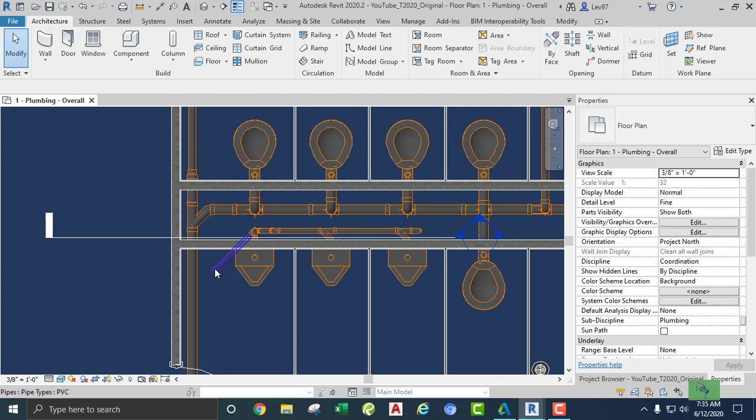Okay, so where did I leave off? Let me go back over here and just check and make sure. Okay, so I think that what I need to do is fit my 2-inch into my 4-inch.

So I'm gonna need a fitting in here, huh? So I think the first thing I need to do is find out what the elevation is. How's that? Why don't we do that first?

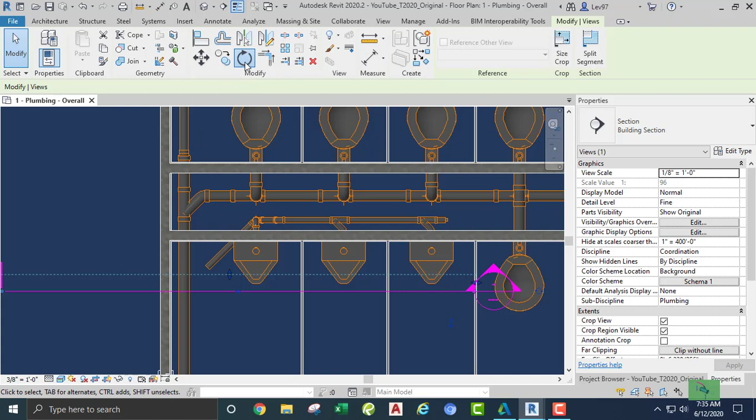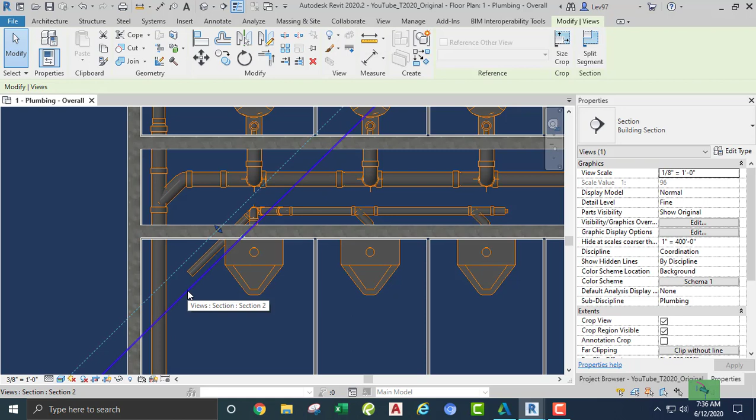Okay, let's rotate this guy. I think I'm gonna rotate this a -45, or counterclockwise 45. Okay, just to look at this, because I know that that is at a 45-degree angle, so let's look at the section and see how relevant it is.

Okay, I think I'm gonna go here, right? So if we look at the two views, let's just look at these two guys. Okay, so this guy is this guy, yeah, that one is that one, and okay, so what is that pipe? Oh, okay.

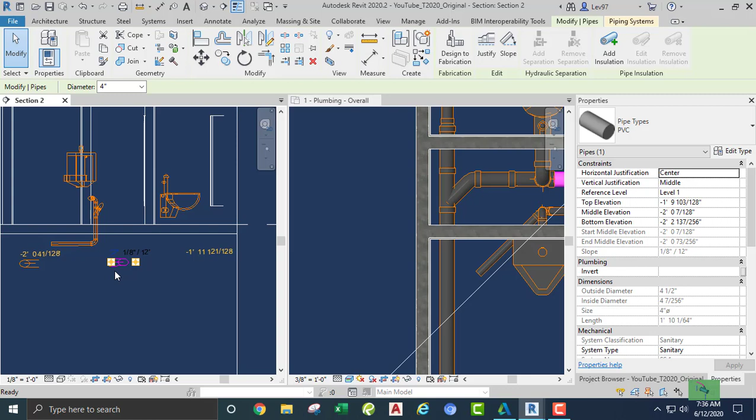So what I'm gonna do is I need to line up one pipe to the other pipe, right? I don't know if Revit is gonna break, but let's try this. Let's try to align, right? One pipe with the other. Rock. Nice, I like that.

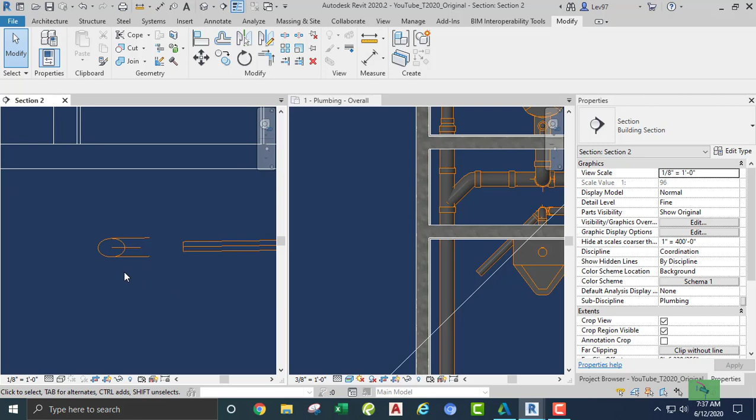Okay, so what I'm gonna do is let's go here. Let's check and make sure. Let's see what kind of fittings we have by default first.

Okay, I think that that's gonna be okay, because if I use a combination, this might be too much. So let me get a little closer and see what happens. Okay, just a little bit closer.

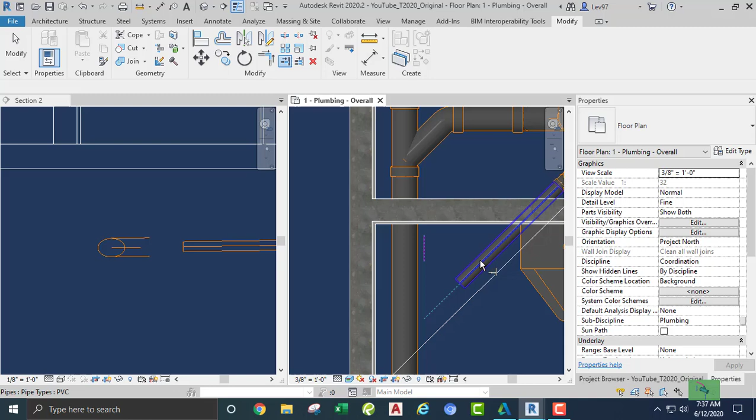So I'm gonna extend. Okay, and just go just a little bit closer. I just want to see how much alignment I'm getting with this center line. That looks good though, you know. I mean, it's not bad.

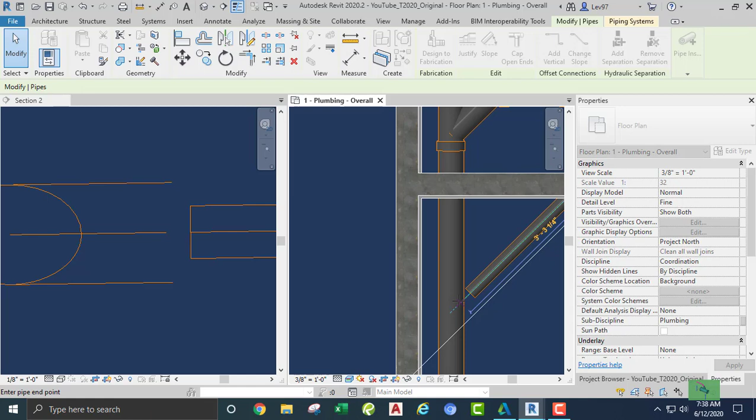So I'm gonna drag this pipe onto my 4-inch. Nice. Okay, that's good. Okay, so we got that, and it looks like what we need to do, everything looks like it's tying in.

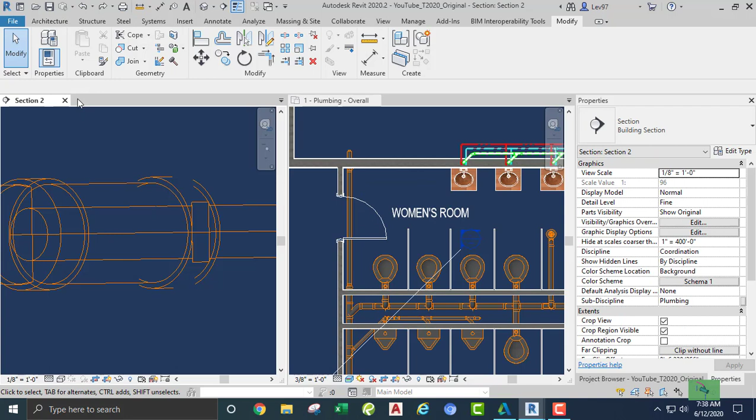Oh, okay. Let's see. So we got this. Okay. And okay, I'm trying to figure out what would be my next move.

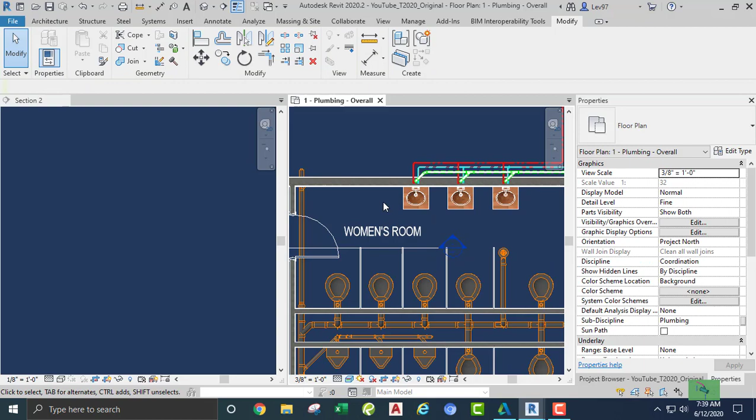Let's move this back 45 clockwise, and so I'm trying to figure out, do I do my venting? Let's turn off these filters, my water systems, so I can see what's going on. Okay, so I got vent here, vent, sanitary.

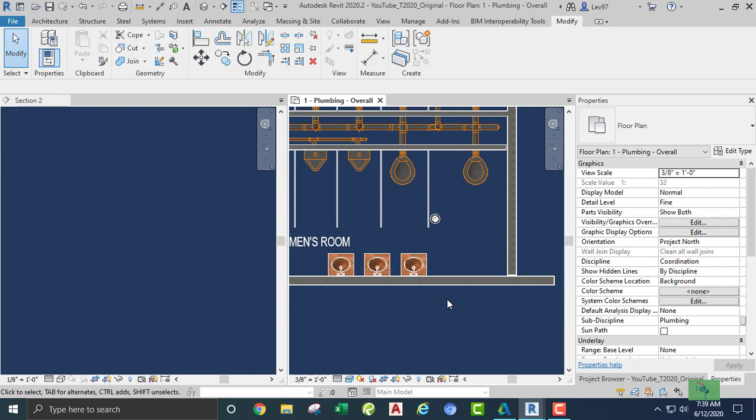Let's see, that floor drain is gonna go south, so it's gonna go here and tie in here. Let's do the vent system. Okay, let's do the vent system, and let's start back here. Okay, but first let's make sure that everything is being populated.

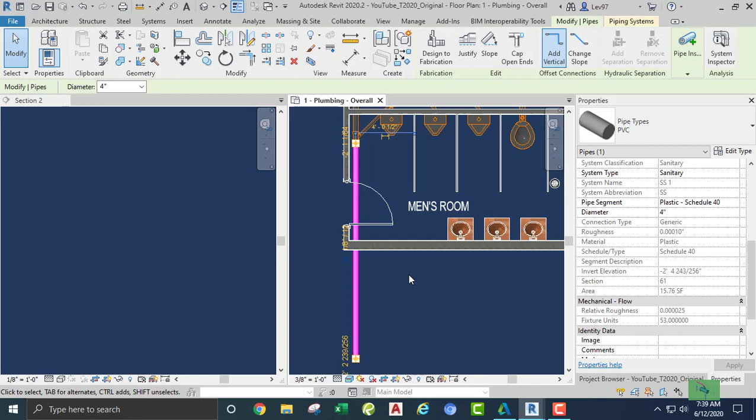Okay, so we got fixture units. We still have fixture units. That's good. That's good, baby. Okay, so the vent system.

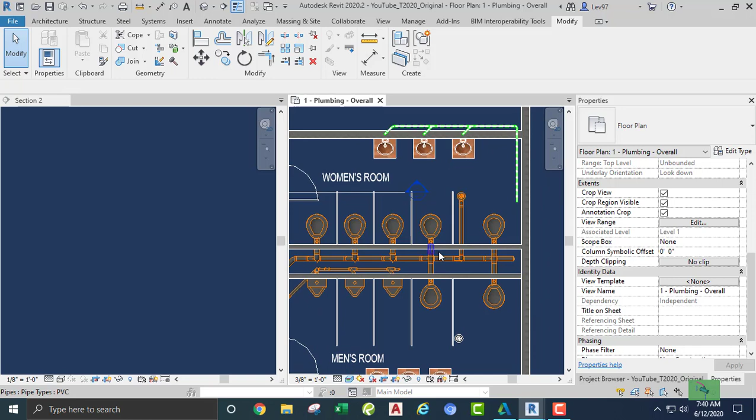Let's start off. Okay, so we got, I'm gonna start back to the west and go east. Okay, because I want my riser to be in this area. Okay, so in order to do that, we might be able to get the vent from the top without going to a section, right?

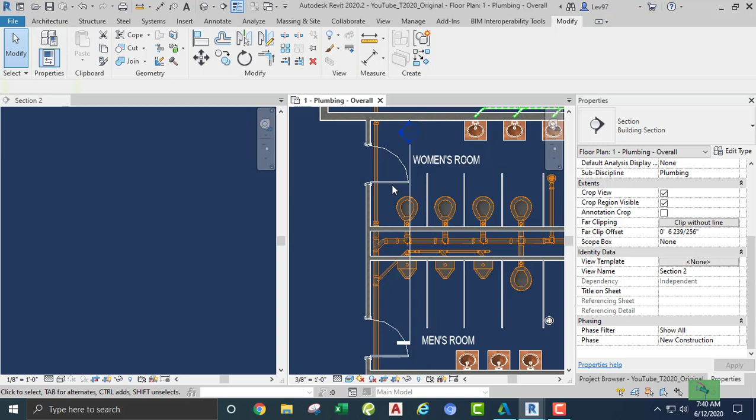Because in this section, let's rotate this counterclockwise 90 degrees, okay? And look at the section, because in the section I can always look at the vent, right? From there, but it would be easier, maybe quicker or faster, to look at the top view, right? Because from here I can look at the vent, because the vent is gonna go from here, right?

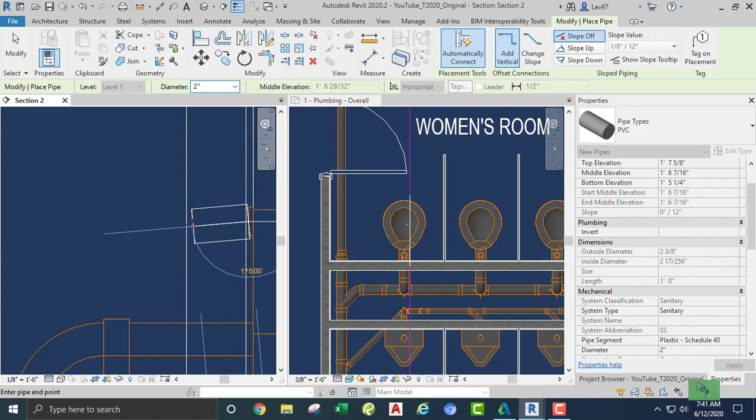Here we go here, and it's gonna be a 2-inch vent, no slope, PVC vent, okay? I don't think I can change it here. Revit won't let me change it while this function is active, right? So I need to go here, go back into my properties.

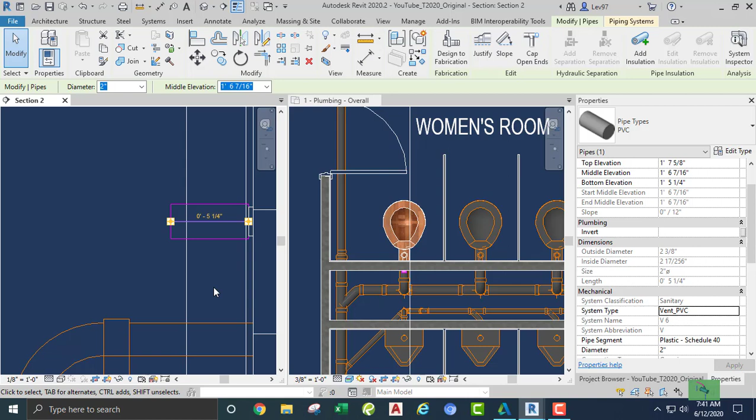System type is going to be vent, right? And mine happens to be vent underscore PVC. Yours can be anything. You go into your system's project browser and change it, right? Let's go and see. I'm here, right?

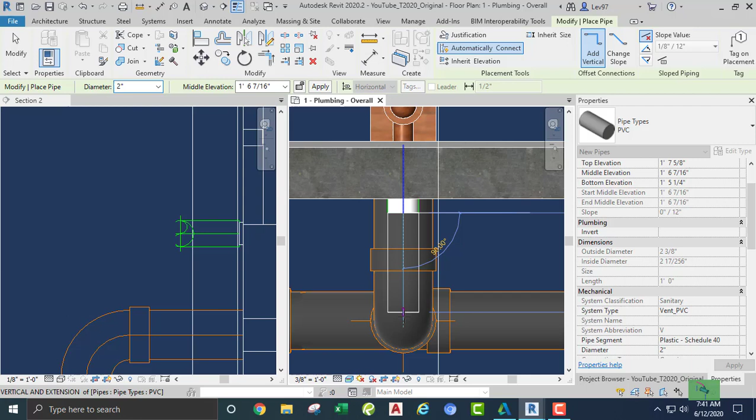Okay, so I'm gonna go here, go up, draw my vent, middle, no slope, my vent here, and make sure that I don't get any kind of connections here, meaning a blue line or any kind of...

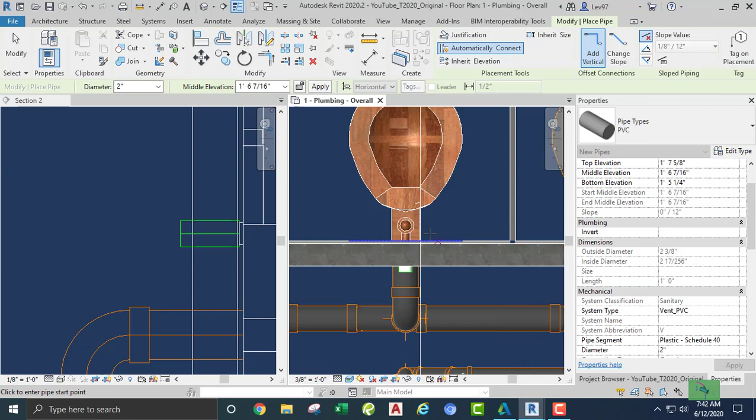See, I wouldn't want to stop here because it's going to pick up that endpoint, I think. Let's see what happens. So if I stop here, see, it's going to give me an error. So you don't want to do that while you're laying out your pipe. You want it to be as clean as possible when you're going down into these areas of work, I guess you could say. So what I'm going to do is I could stop it here, right?

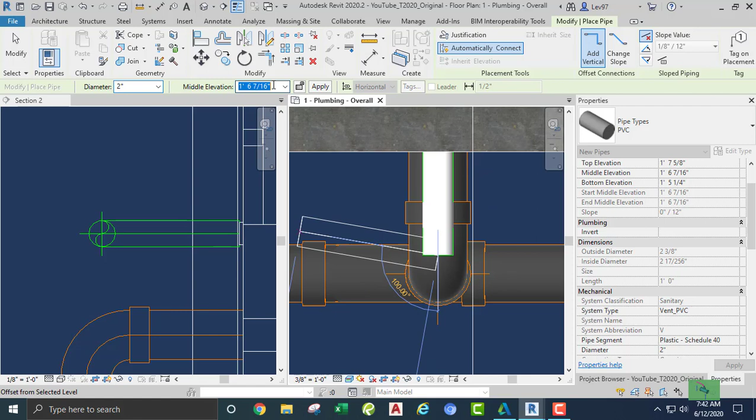Because there's no... I'm going to stop it here and go up. My vent is 11 feet, right? No slope, PVC, everything looks good.

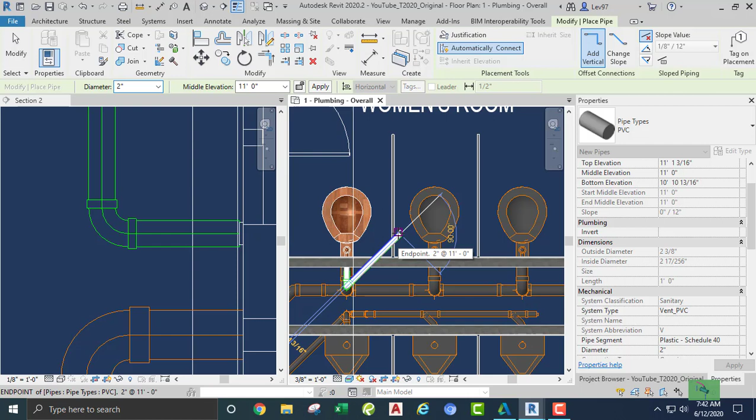And I'm going to come out of the plumbing wall at 45 degrees, which would be 135 or 45, 135 here, right? Okay, so we're at 11, and I click my left mouse and go, that's going to be 2, I think all of these are going to be a 2-inch.

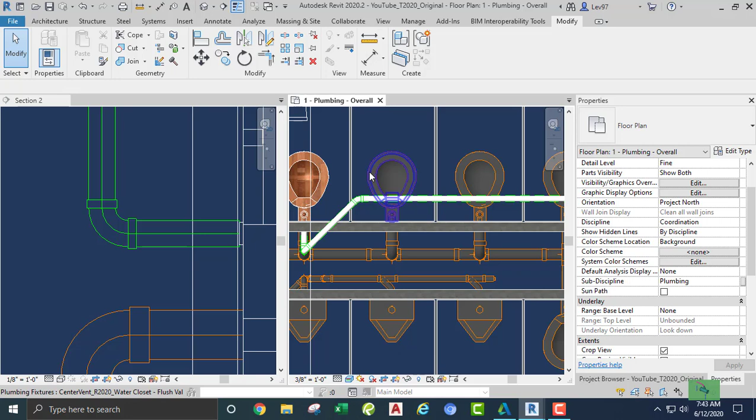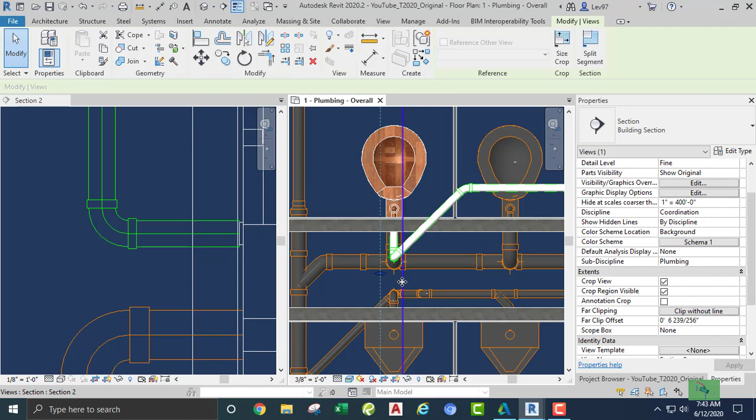Okay, so I'm going to stop here and continue. I think it's going to be easier to go from the top. Okay, so I know that that is my cold water, and the node south of the top one is my vent. I know that because, let's just go back and check, make sure things change. So let's go down and look at the section view.

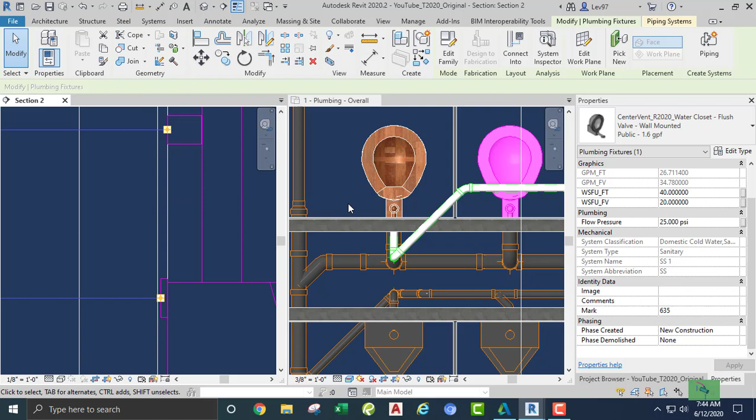Okay, let's go here. Now we are looking at this, because it seems to be further down. It's this one, because it's out further. You just, based on doing these a few times, you kind of know. But to be safe, it's always good to go to section view, or whichever is comfortable for you.

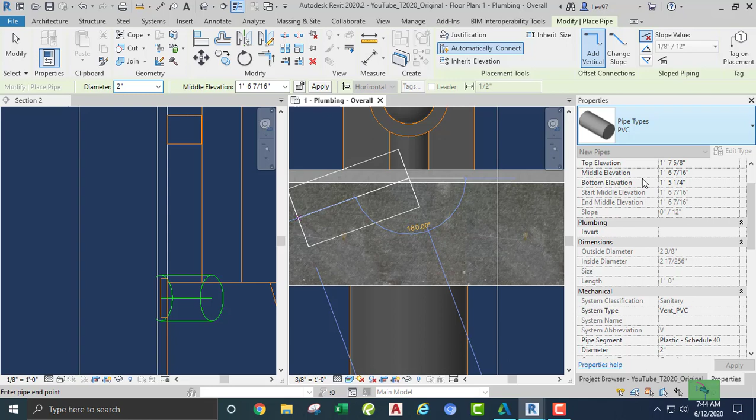Okay, but I know that that's the vent, so I'm going to wait until it turns green. I'm going to right click and draw that vent pipe. I'm going to make sure my parameters are okay, because I drew the first one on the first water closet, now it's going to default back to the system type of vent because I'm working in that system. And we all know the secret of not going to any existing nodes. We want this part to be clear.

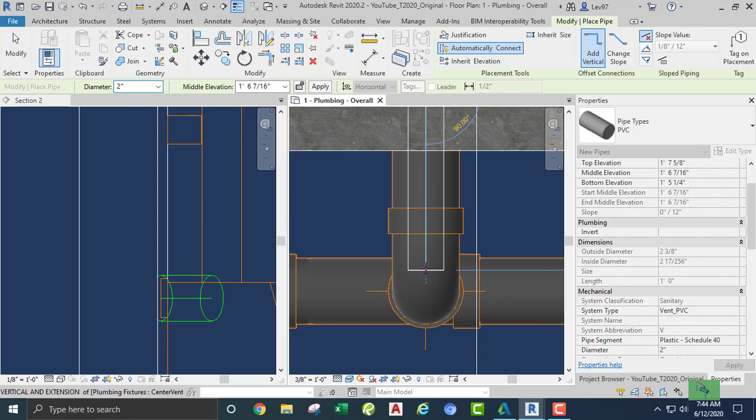Okay, so we go here, same thing over and over, all around the world, same song. Okay, so we got here, 135.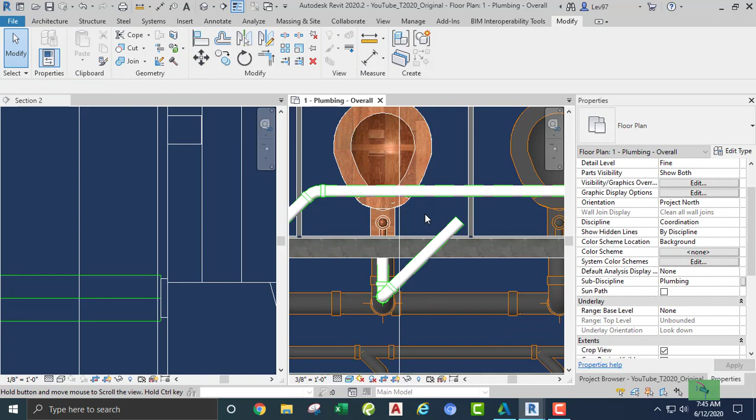I think I might be able to connect. Let me check, let's check our fittings, right? Our fittings, because we're going to fit one pipe to another. That's why they call them fittings. This is an elbow, but it's considered a fitting, right? It's a pipe fitting. You fit one pipe to the other pipe, right? That's the fit. You fit.

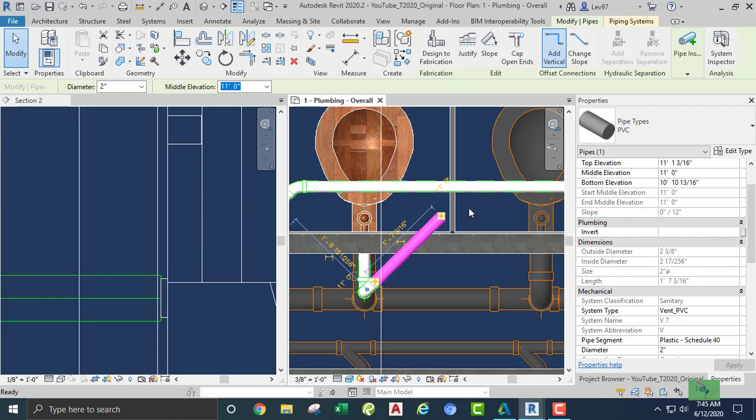What am I doing? Oh, I need to find out what kind of routing. I think it's still that T, right? The T reducing. So I think that might be okay. I think that's going to be okay. So we extend one pipe to another. Nope. I am looking at, let me look at my notes.

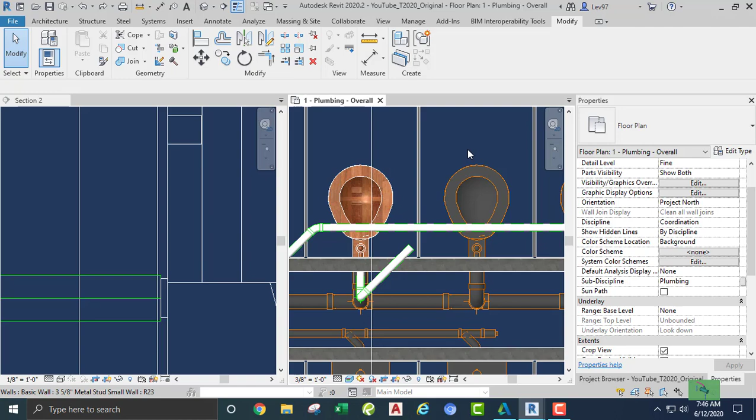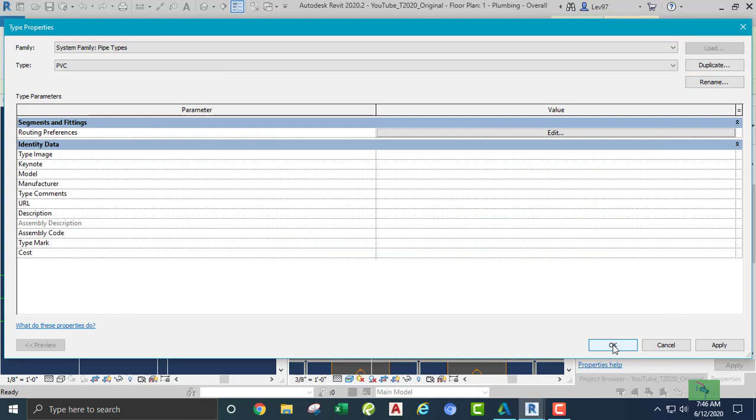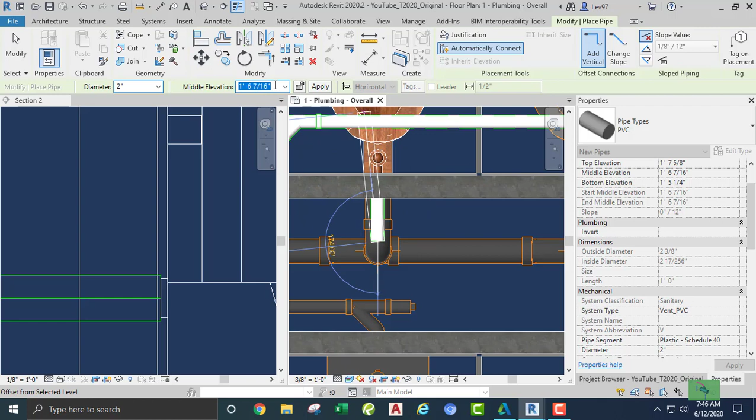Okay, so we do the same thing here. We go 1, 2, 3, right? And it just gets easier and easier. That's okay, 135. Can kind of go up there, right? We go here, right? Same thing with this guy. We go right there, same thing.

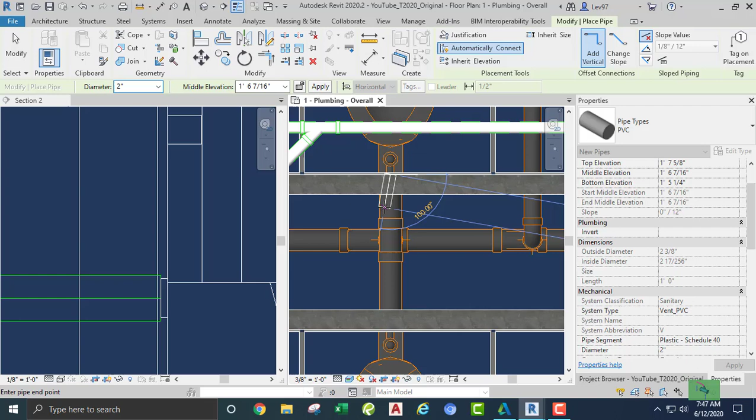Let's go out, because on our plot plan, we want it to look like it. We always compare it to AutoCAD first, right? Because the reason I'm bringing it out is because then usually we... Okay, let me, I'll show you guys in a minute. Okay, so we go up 35. Connect here. Yeah, okay, now let's go to our plot view, right?

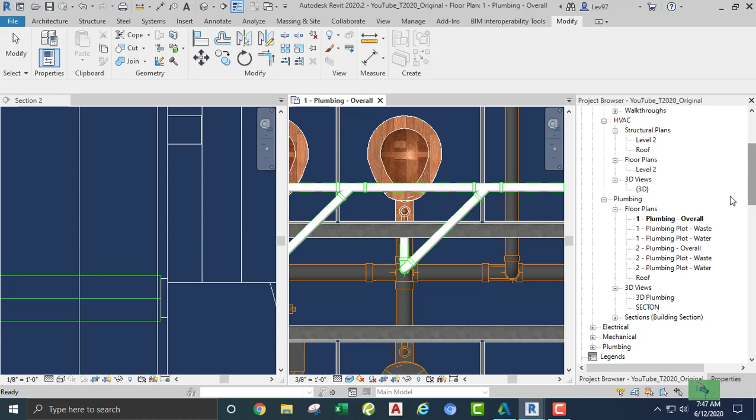Waste plot here. And the reason is because, let's see, that can come out a little bit more. Both of these, all three of these guys look like they can come out a little bit more. But this is the plot view, right? This looks more similar to what we're used to in drafting in AutoCAD, right?

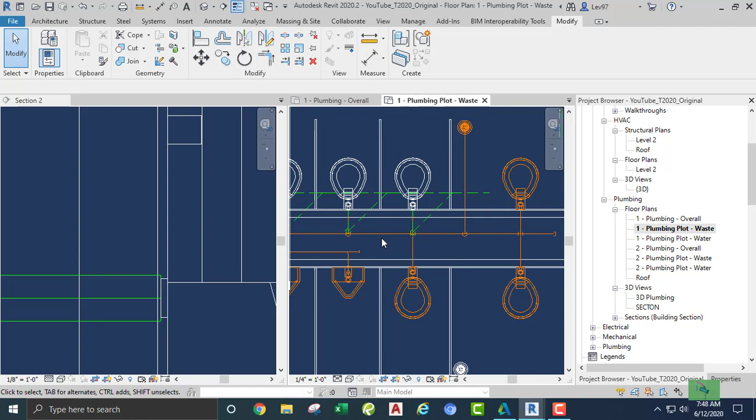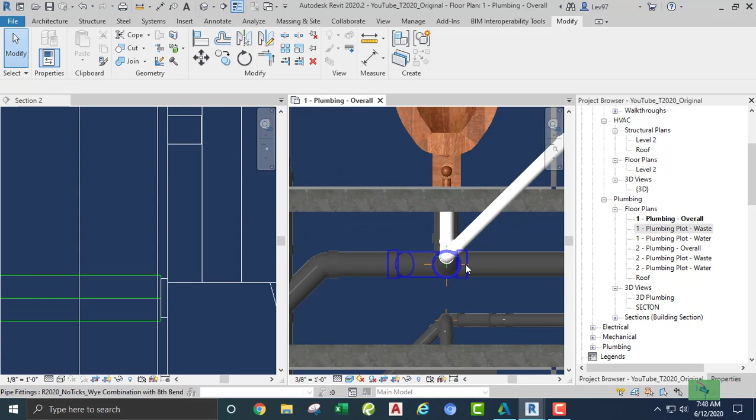So I mean, it's not, it can be tweaked, but I'm not going to do that. I've done that, so I'm not going to do it now. So that can be tweaked, you know, you get the idea, right? Because here, see the little gap, see the gaps, but that's just part of how things are done. Editing is part of the program, so that can be edited, right?

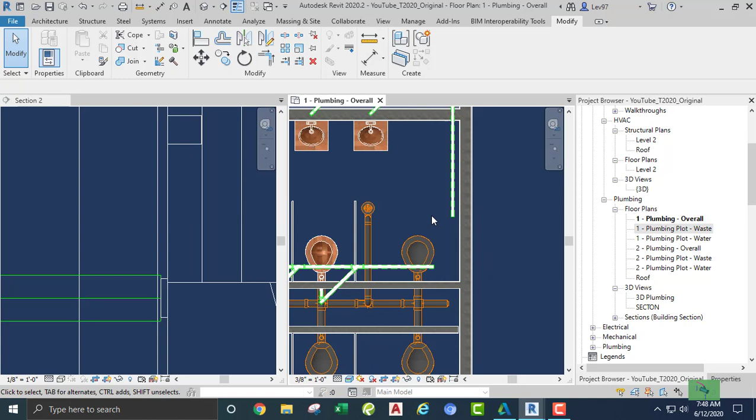It's all going to be edited. And let's go continue here. Looks like I'm going to connect into that one. It's coming off these three. Okay, let's go over. Let's pick up this floor drain. Okay, and that vent is going to come from back here, but usually, however it's going to come from.

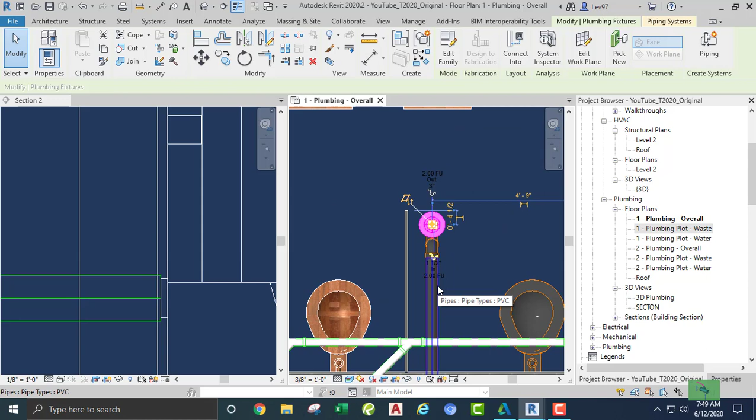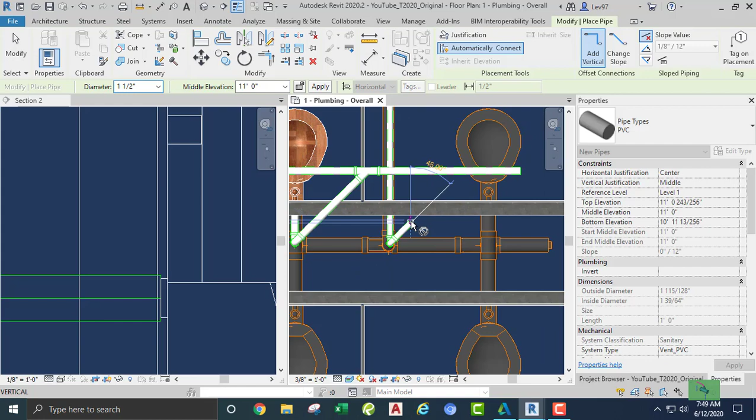Okay, so we have a vent, right? That's our vent, 1 1/2 inch vent, no slope, PVC vent. Okay, we come all the way out to here, same thing, and we go up 11, right? We go over 135. I'm gonna stop it here and then extend. I think it's gonna be in this area. Looks like I have enough room to put that fitting on that pipe, right? Yeah, that looks good.

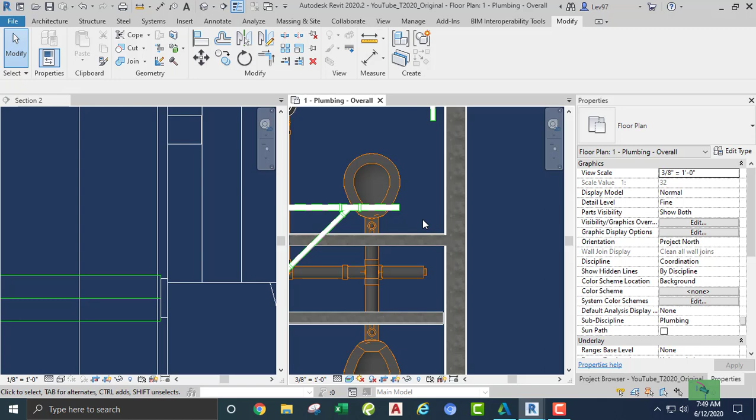Okay, what have we got? We got 2. We got the riser is gonna be here. Okay, that's a 1 1/2 inch. Okay, that's fine, let's go here.

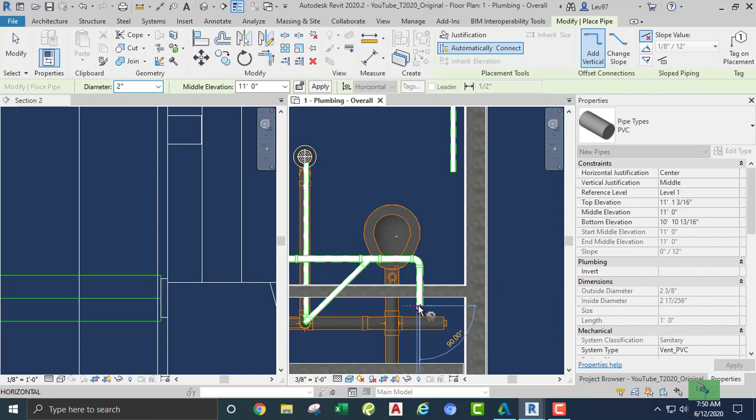I am going to go 11, 2, 2. I'm gonna go here, right? The reason I'm doing that is because I want to align. It's not a vertical. If you look at it on plan, I would say this vertical pipe to this vertical pipe, but actually they're in plan, they're not vertical.

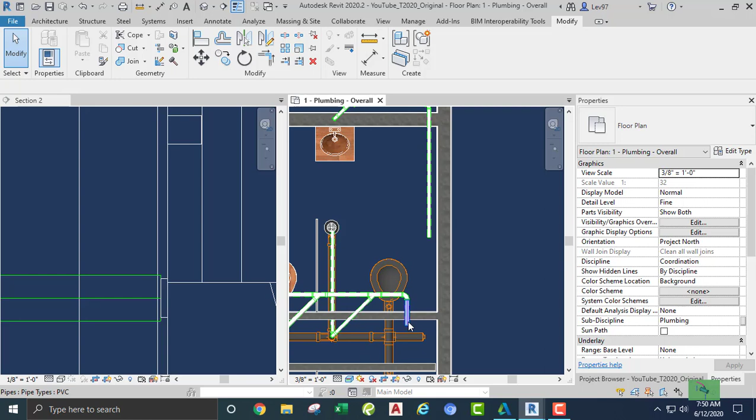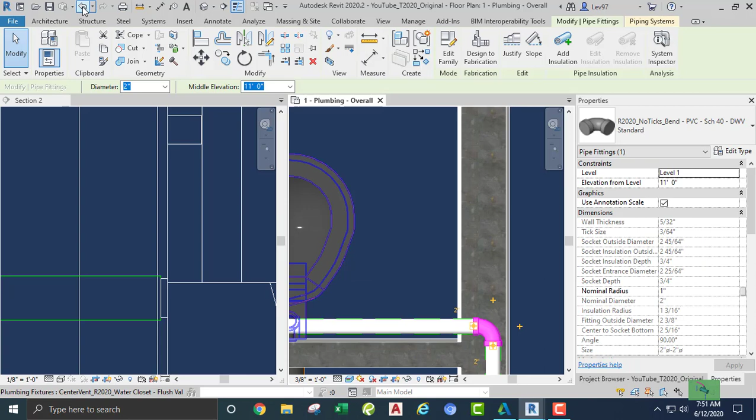So what's up, and the reason to align, I should say in this plane, right? In this plane, how do I explain that? Align that pipe with that pipe in that plane. I don't know how it's... let's see, why is that? Why can I not? I'm trying to erase. Okay.

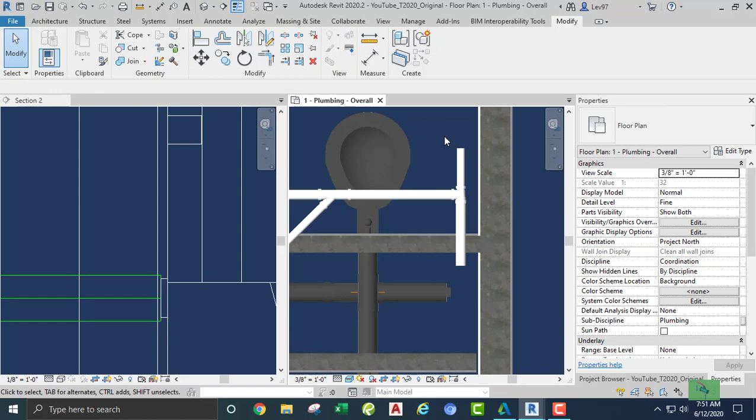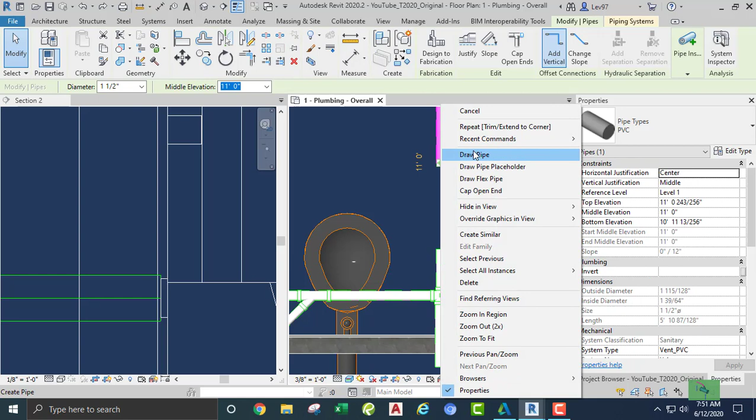And I can extend this guy. Let's go here, because I'm going to connect the 1.5 inch. Okay, and let's change this to 1.5 inch, just because, it can, wherever that's going to be. And we are going to, now, drag usually works when you're doing this kind of editing. Let me go back, because you can draw a pipe from here to there. That usually works too. Okay, so we got that.

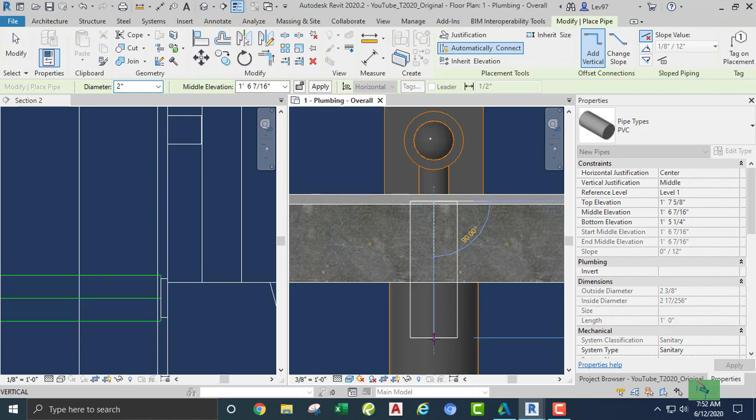I'm gonna go here and go over, huh? Let's do this. Okay, this is a little tricky, but this is one way of doing it. I guess you can go here, right? And we're going to change this. There's no slope on this pipe, right? What happened?

So you see in this area, it's not going to define whether the pipe is sloped or not. You see, there's nothing telling us that, right? Well, okay, so in order to see what I'm talking about, whether or not the pipe is sloped, you have to click on this node, okay, and then draw, and it will tell you. This is what I'm talking about, it will tell you whether or not the pipe is sloped. So I don't know why you can't get that information from here.

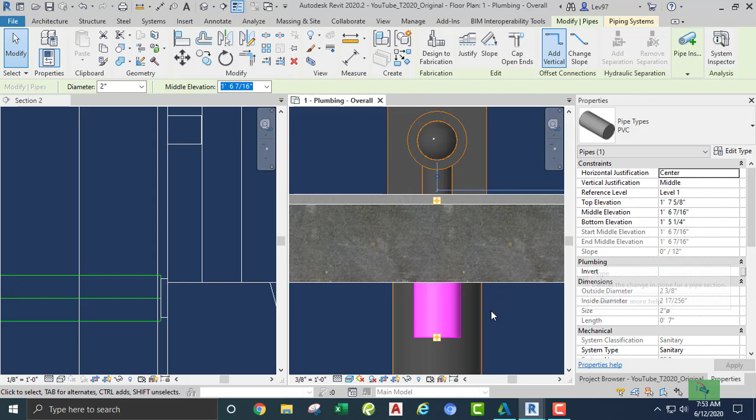Does it say anything? Oh, here it's telling us that it's not sloped here. Okay, so, but anyway, that was just something for you guys to think about if you're looking for something.

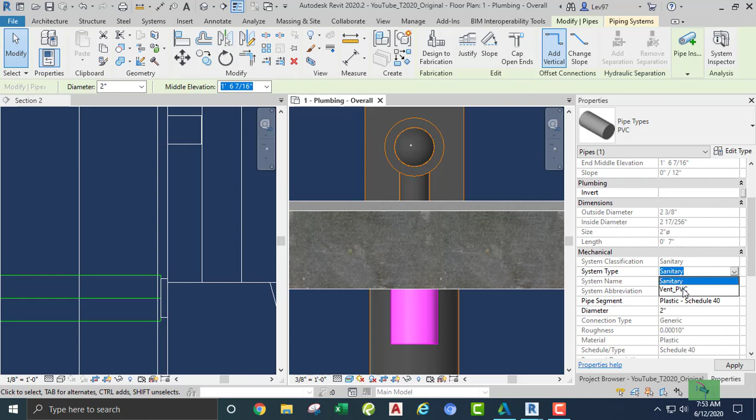But before I do anything, let me change this to a vent, because we don't want stuff going up in the air, right? And you know what I mean by stuff. Okay, so that's that, and now I think I'm gonna finish with this pipe. Okay, let's go up 11. Right click, left click, and 11. So we got no slope, and we got vent.

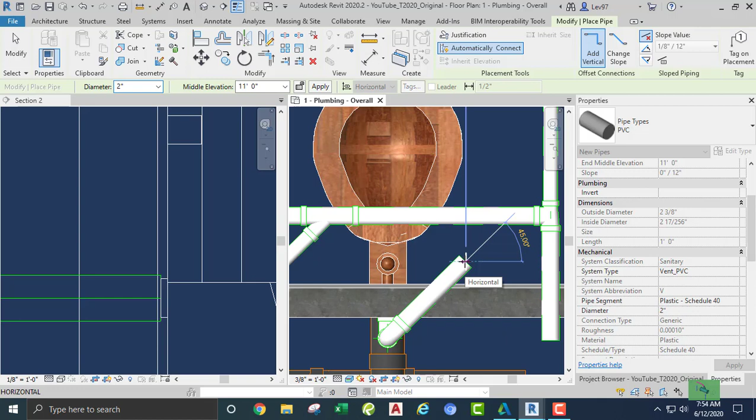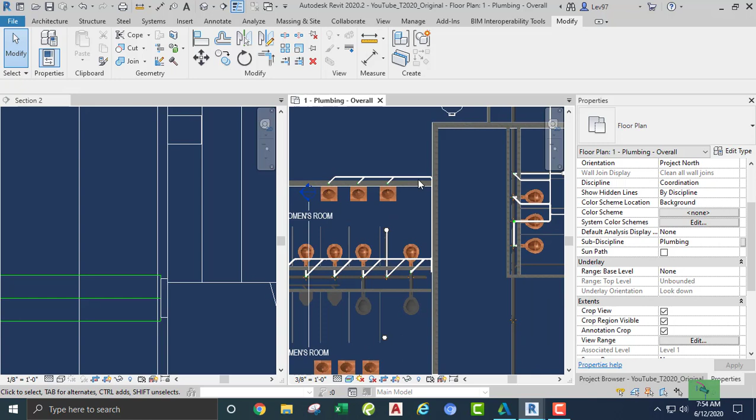Here. Ooh. Not a lot of room. But we can always move this. I'm not gonna, I can always do something. See, let me go back. I can always do something.

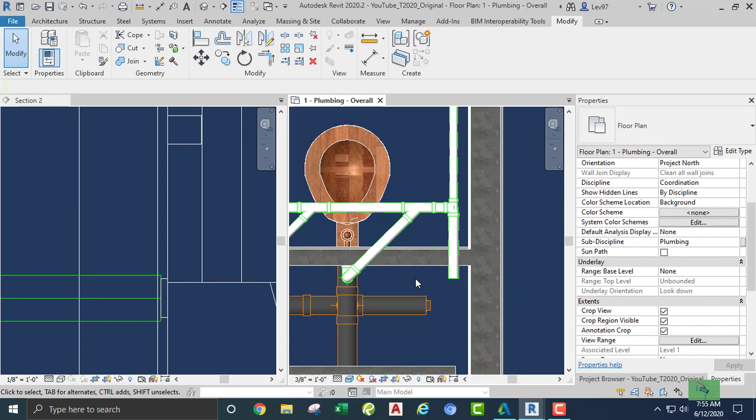Okay, I'm not gonna worry about this wall. I can move it over, right? Have the architect move it over, move your wall, there's not enough room. But this can be, I wouldn't do that. It can go up from here and go with a straight 40, 45, but then there wouldn't be room here. So we would need room. Anyway, I could probably go from here, go straight in. There's different ways of doing it, right?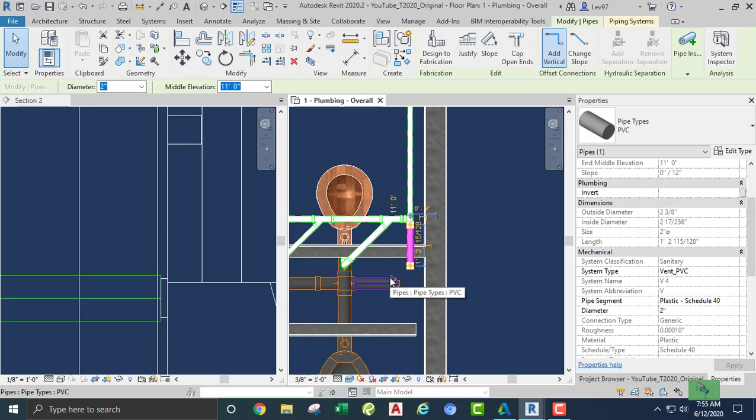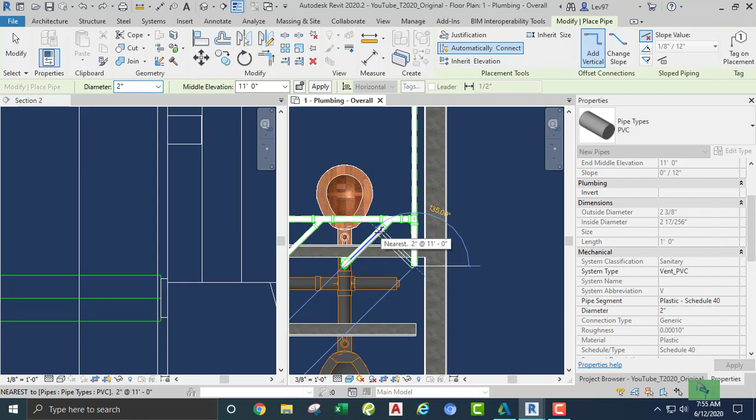So what I'm gonna do before I finish is create my riser, and that's we draw the pipe. It's a 2-inch, but before we go through the roof, this is gonna go up to the second level at a 2-inch. It could be a 3-inch, depending on the number of fixtures.

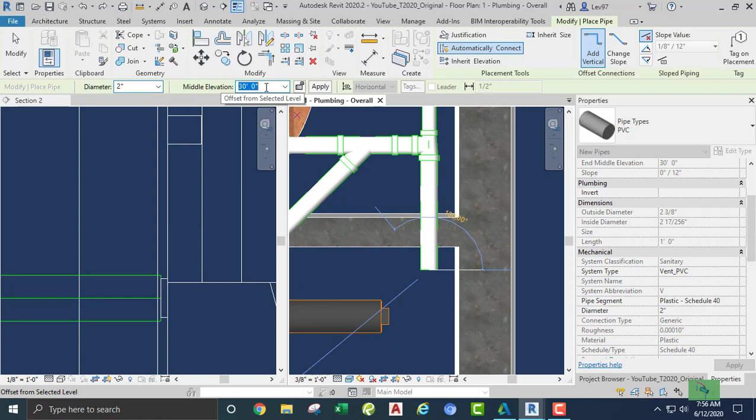But anyway, so we got all of this, and I'm gonna change this to say 30 feet, okay? And you see nothing's happening in here because I need to apply that information to the system, right? So I got 30 here, now I need to apply, right? And then it's gonna go up. You see that? So let's do this and go to our 3D view.

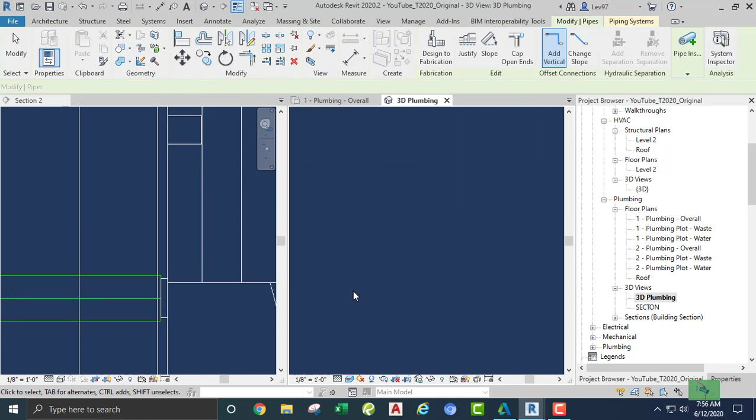And let's just make sure we highlight that so that we're not hunting. Come on. Okay, all right, so that's that. Okay, that's good, that's good.